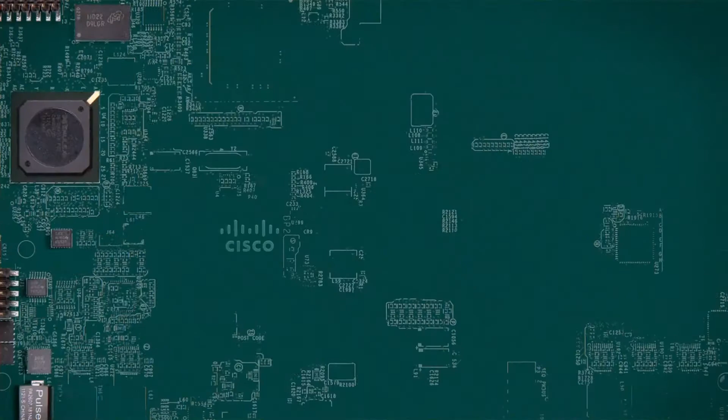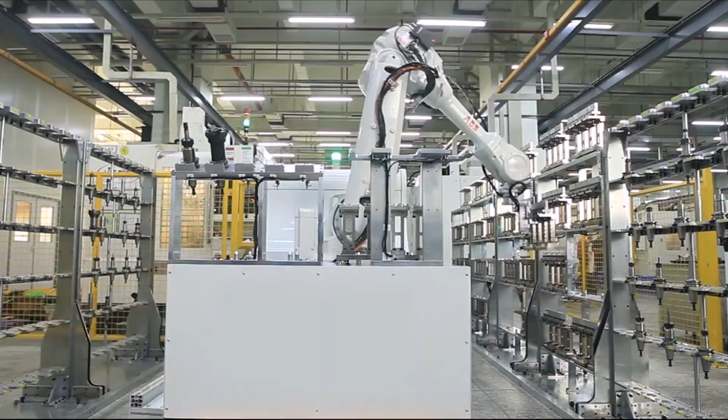ASM Pacific Technology Limited is the world's largest supplier of semiconductor, LED, and packaging equipment, dedicated to providing semiconductor manufacturing and assembly equipment for chip makers, IC manufacturing and assembly plants, and consumer electronics manufacturers.

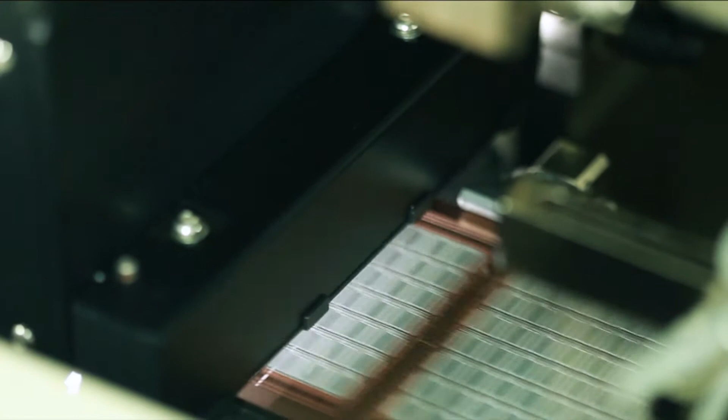In the past, like other enterprises in the industry, ASM's design and manufacturing processes were disconnected in terms of data, and it would take a long time for a product design change to get from design to the production floor.

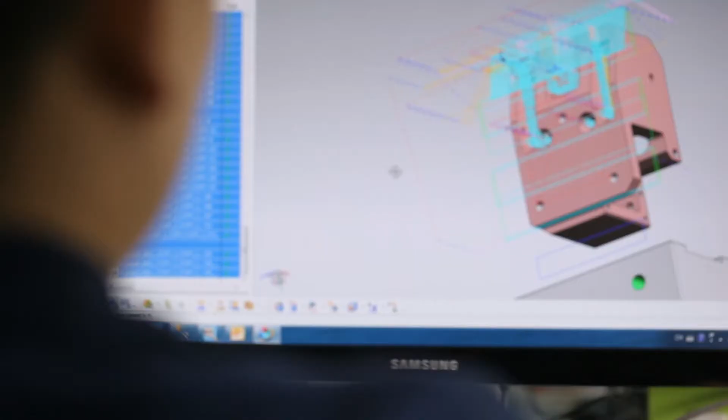As the leader in the semiconductor equipment industry, product development and high-efficiency manufacturing are ASM's core value-added activities. Annually, ASM invests 10% of sales revenue into our R&D activity. We establish R&D centers and manufacturing plants in major cities around the world.

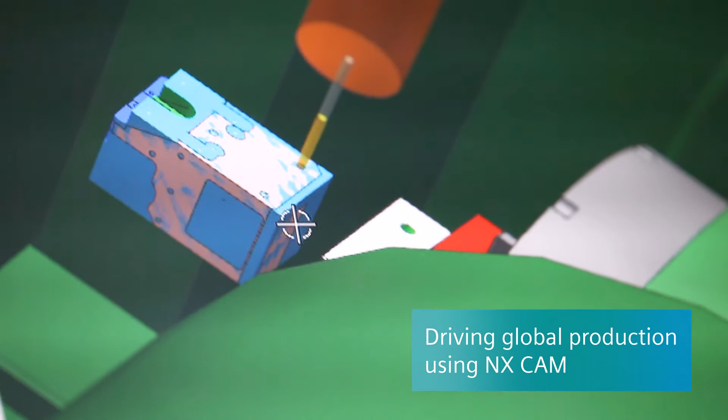To bridge R&D and the manufacturing system, we established communication and information systems for concurrent engineering, enabling seamless R&D and manufacturing integration. Since year 2000, ASM manufacturing plants have started using NX CAM, which is part of the ASM PLM solution. Up to now, we have implemented more than 100 licenses located in Shenzhen, Singapore, and Malaysian factories.

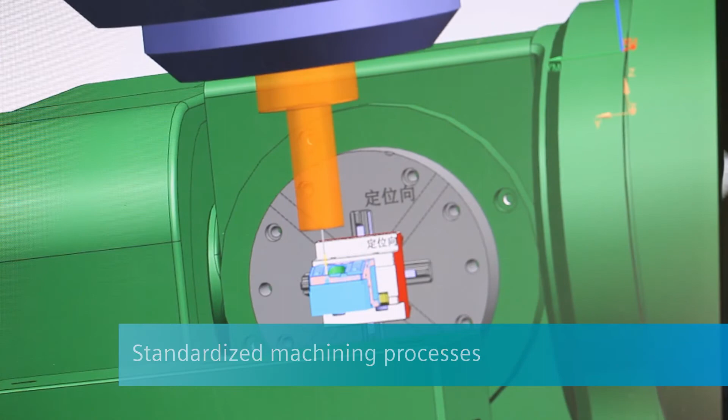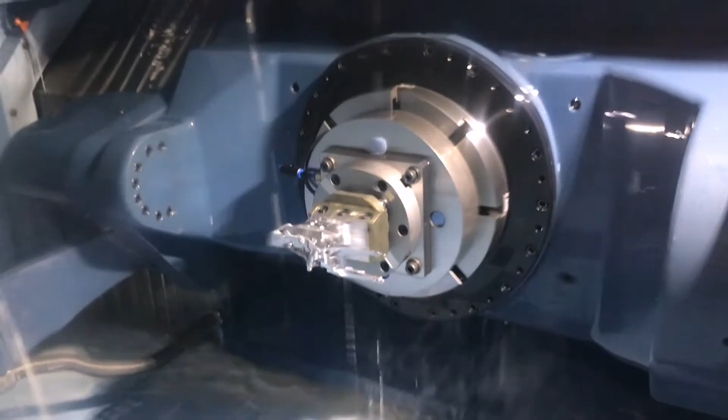ASM broke through the data barrier between design and manufacturing using NX CAM, realizing process-based machining programming, intelligent recognition of machining features, standardization of machining industry rules, and automated creation of machining tool paths, thus minimizing human errors made by program designers, while maximizing production efficiency and quality by using computers to perform CAM operations traditionally done by men.

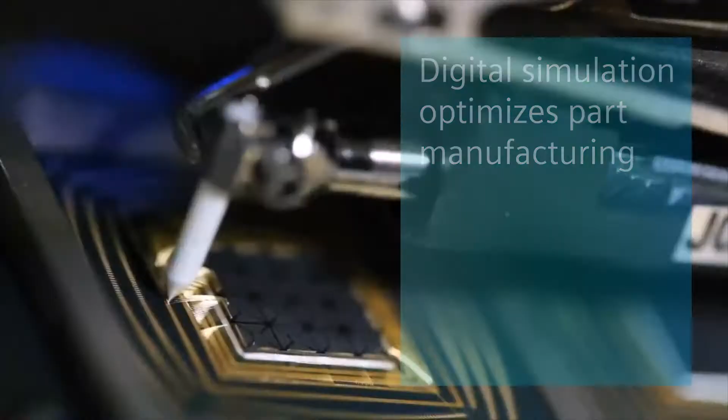Simulation under a real machining environment can effectively assess the accuracy and reliability of complex programming. By using the ISV in NXCAM, our engineers can verify the cutting tool path of the CNC program and visualize the material cutting process in the computer instead of on the production line.

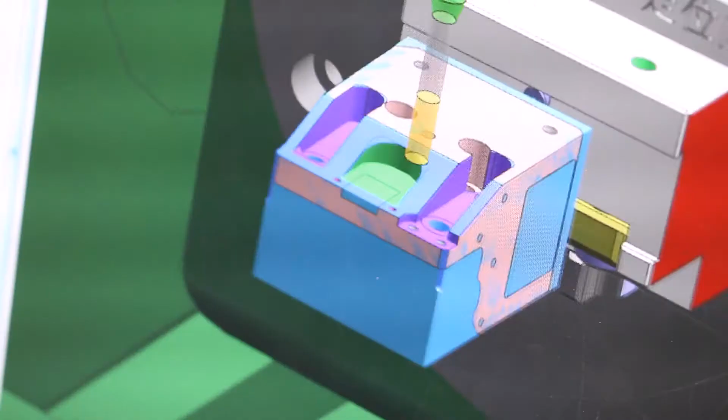The simulation result in ISV is G-code based, so we can visualize the actual movement of the 3D models of the CNC machine, including the cutting tool and fixtures. This function can greatly improve the first pass rate of our machining parts.

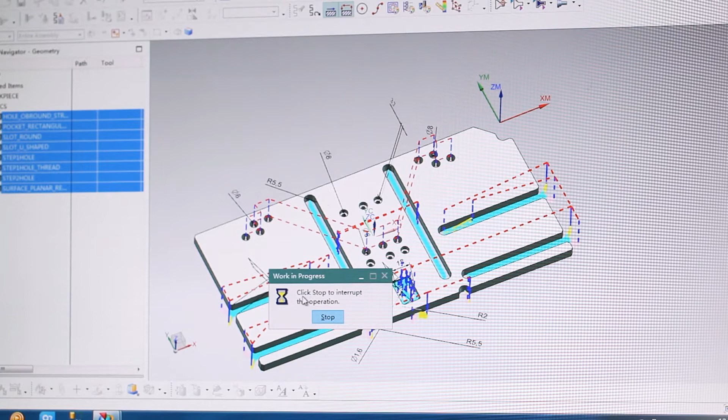Traditionally, programming was manually done step by step based on each and every feature. With feature-based machining (FBM), however, feature recognition and programming are automated, significantly increasing efficiency and accuracy. The FBM in NXCAM can help us realize the synergies of CAD and CAM.

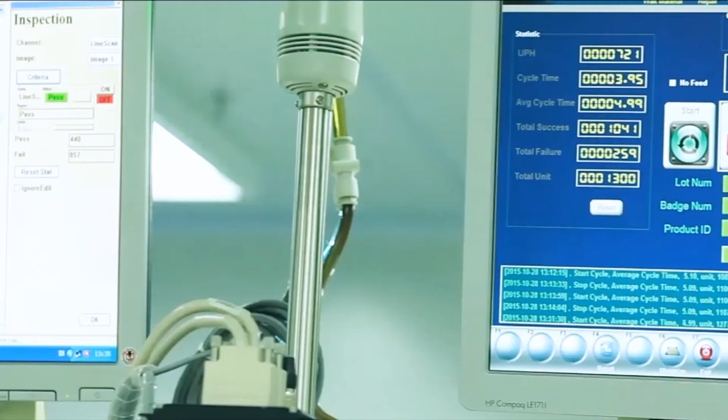FBM not only helps us improve the response time of manufacturing upon design change, but also improves the response time to our customers' requirements. FBM helps us automate the CNC programming process so that we can shorten the time to market of our new products.

Based on our statistical results, FBM and PMI can help us improve productivity and quality by 70%. By using more advanced machining technology, ASM, a long-term dedicated supplier for manufacturing enterprises of intelligent products, is now on its way to becoming an intelligent enterprise itself.